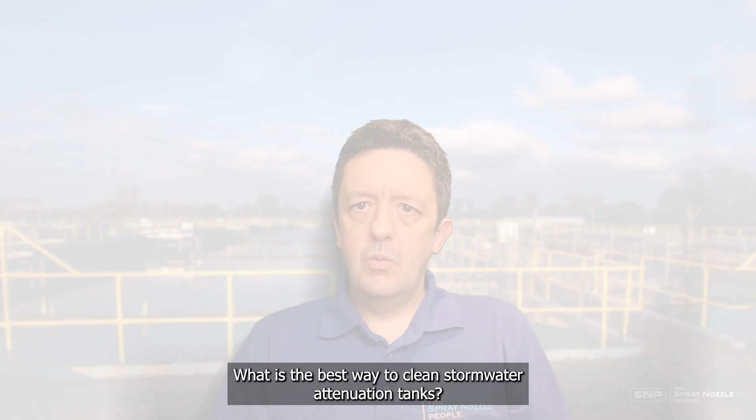What is the best way to clean stormwater attenuation tanks? Now, there's a number of different methods to automatically clean storm tanks on the market. The tank size and the layout will dictate to some degree which methods are actually possible to deploy, but which

method is best? Now, in our opinion, the hands down winner for almost all conceivable storm tanks is an automated rotary jet cleaning system, like our StormBlaster system.

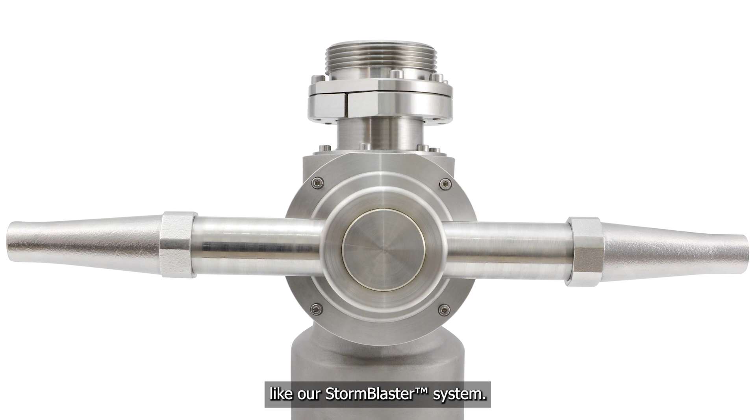Generally speaking, rotary jet cleaners will be cheaper to install, they'll give a more effective clean, you'll have to do less tank modifications to ensure that it works, and they'll clean a wider range of tank sizes and layouts. They'll do this more than any other method. So for almost all tank systems, rotary jet cleaners are the best choice.

So the question is really not what is the best way to clean a storm tank, but when is it appropriate not to use a jet cleaning system. There's a couple of situations where it may not be possible to deploy these types of systems. One situation is if we had a very, very large open tank, so a non-roofed tank.

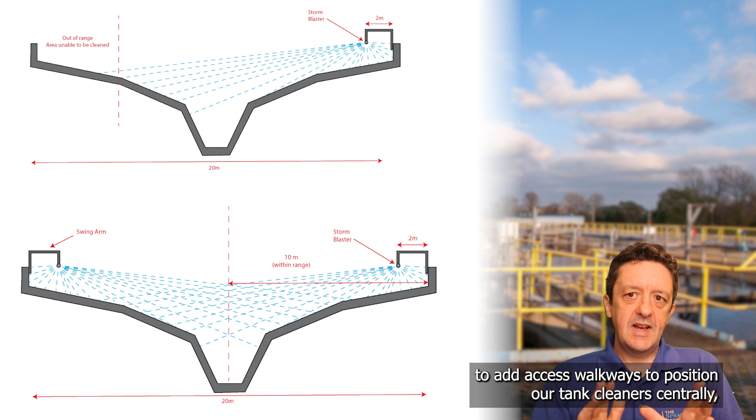For example, if we had, say, a 60-meter long and 20-meter wide open tank, and it was not possible to add access walkways to position the tank cleaners centrally, then we'd be forced to position them on swing arms from the side. This could prove challenging in such a tank. It's not the length, it's the width that is the problem.

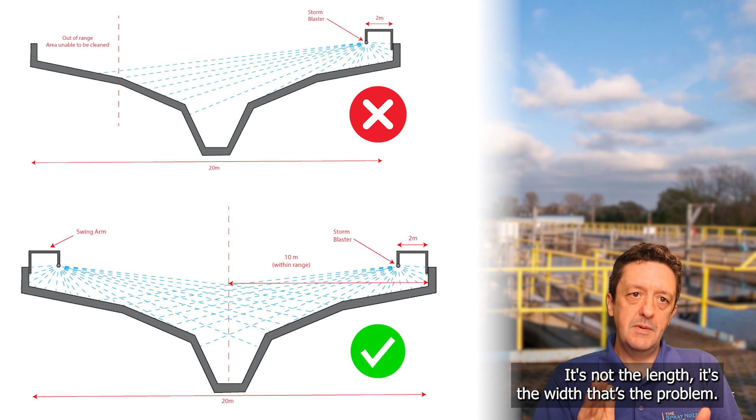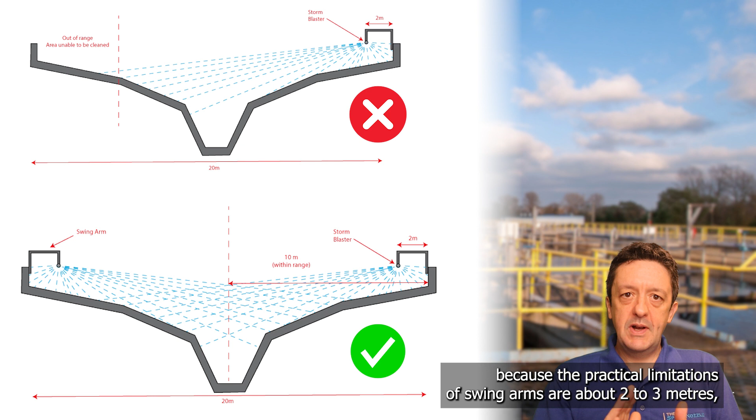We can deploy multiple tank cleaners down the length of the tank, but if we could only come in one side, that 20-meter width may be problematic because practical limitations of swing arms are about 2 to 3 meters, so we'd have like a 17 to 18 meter horizontal distance to cover to get to the other side of the tank. This could prove problematic even for the large StormBlasters.

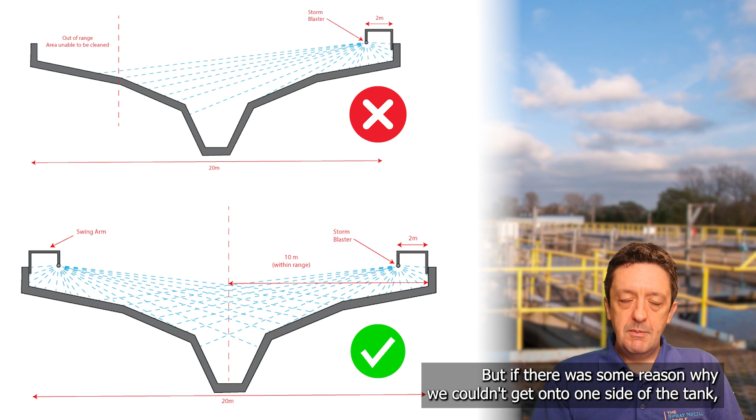Now, if we could hang them on both sides, then that wouldn't be a problem. You could just put StormBlasters on each side of the tank and that would be fine. But if there was some reason why we couldn't get onto one side of the tank, then that could be a problem. A very large, open, very wide tank.

Another situation where it may be problematic to use the StormBlaster system is if there's almost no drain gradient in the tank. Now, obviously any purpose-built storm tank is going to have a suitable drain gradient because it's designed to be emptied, but some repurposed tanks may have gradients below 1%. And if it's much below a 1% gradient, then that can be problematic.

If the liquid can't drain away quick enough, it will redeposit any sediment that gets blasted off by the StormBlaster. Now, quite what you'd use as an alternative in these situations, I'm not quite sure, because all the other methods of automated tank cleaning also require a drain gradient. So there's going to be a problem there either way. Any gradient below about 1%, you're going to have a problem there.

Another feasible situation is if for some reason you can't get a suitable booster pump or fluid pressure on site. Now, rotary jet cleaners need about 4 bar minimum of fluid pressure to operate, but ideally they'll work best between sort of 8 and 10 bar. If only sub 4 bar fluid pressure is available, then they're not really viable.

This is especially true if the tanks are larger, as we need the higher pressure to get the necessary jet lengths there. In most situations, a simple booster pump will solve this if you haven't got the pressure there on site already. But if that's not possible for whatever reason, then you may need to consider other methods of tank cleaning.

These are the kind of limited situations where we would find it problematic to use a StormBlaster system or a rotary jet cleaning system. But that being the case, they're quite limited.

So why aren't they universally used? If they're the best method, why aren't they universally used? Well, this comes down to a few factors. Firstly, it's a lack of knowledge and understanding. Storm tank cleaning isn't a key application in the wastewater industries. It's kind of like a sideshow, if you like. It's not something you spend a huge amount of time thinking about. And so it can be quite difficult for newer ideas to permeate into the industry.

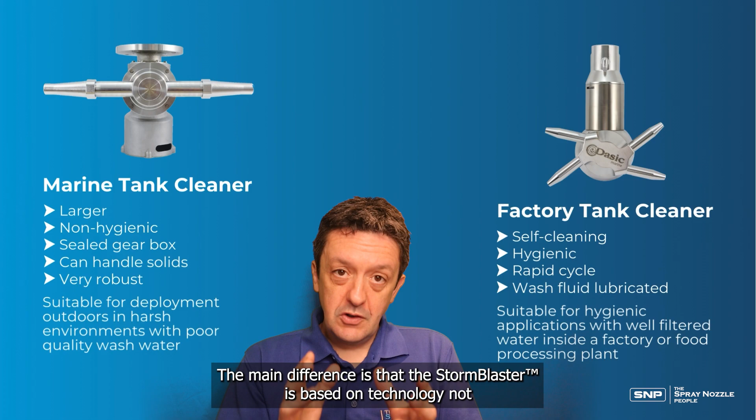StormBlaster is different from that. We solved that with the StormBlaster, and we solved that about 8 years ago since we've been deploying these systems. The main difference is that the StormBlaster is based on technology not that was used in factories, but was used in the marine environment for cleaning oil tankers. So they're big, tougher, more robust machines that are used to dealing with poor quality wash water and to be sat outside exposed to the elements.

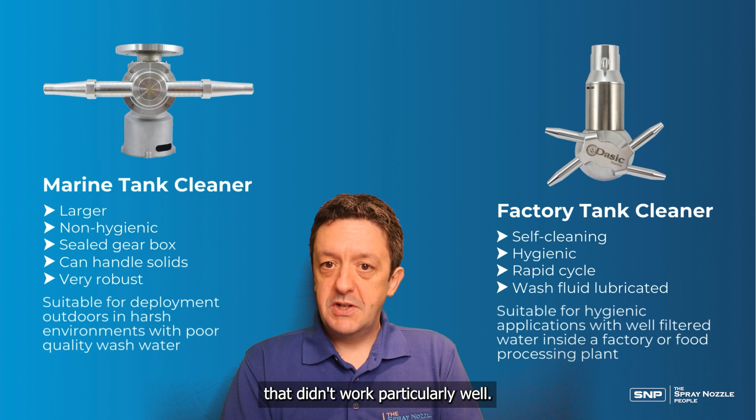They're originally in a marine environment, which is even harsher than sat outside in a storm tank being exposed to the elements. That problem has been solved now, but there's still some legacy issues from those initial attempts using different rotary jet cleaners that didn't work particularly well. There's a misperception there. Thirdly, again, with those previous attempts, there's some incorrect cleaning protocols, and this resulted in a variety of missteps as well.

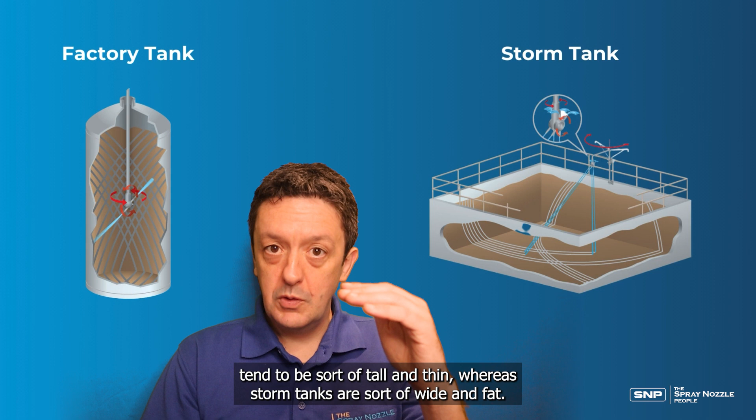Storm tanks are a different layout and different type of tank to factory tanks. Factory tanks tend to be sort of tall and thin, whereas storm tanks are sort of wide and fat. Now again, notice these storm tanks are actually quite similar profile to an oil tanker in many respects. So again, using the right technology and using the right protocols for designing these cleaning systems is important. And if you just take protocols and layouts that you use in a factory setting, in say a food tank or something like that, and apply them to a storm tank, which is a different kind of tank layout, they didn't work. So there were some problems there as well.

We've developed the correct protocol now over the last 7 or 8 years, and we now have 130, 140 odd StormBlasters out there working away with no problems at all, cleaning storm tanks very, very well. The fourth factor why they're not universally used is it's a relatively slow moving industry. We have sort of 7 or 8 year spending cycles for infrastructure projects. New technology, especially in smaller applications like storm tank cleaning, isn't adopted very quickly. So it's just a question of time to get this technology out there. There's a kind of mentality around storm tank cleaning, oh, this is how we've always done it, so that's how we're always going to do it. And it takes a little time for us to get the message out there.

A fifth reason why they're not universally adopted is necessity is the mother of invention. Storm tank cleaning hasn't been a particularly big problem so far. It is now, and it's becoming more of a problem. As we have more storm tanks near residential areas, it's becoming more and more of a problem, and environment agencies are starting to issue more and more fines for odour pollution caused by dirty storm tanks. That necessity is now being the mother of invention, and so we need better ways of cleaning storm tanks. As that continues, the best way of cleaning storm tanks, which is rotary jet cleaners, we think is going to be deployed more and more throughout the industry.